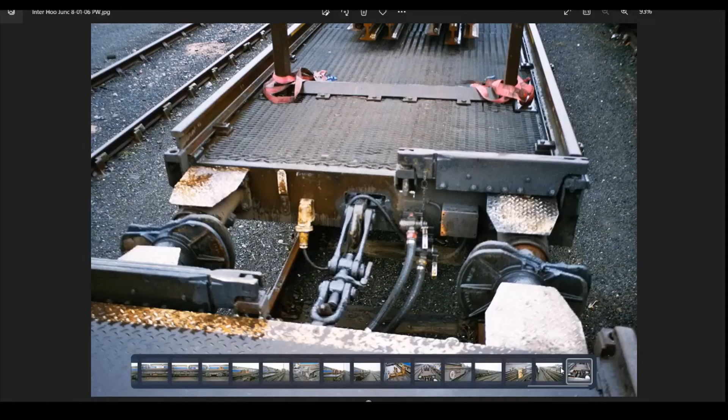Welcome back to 3D Drawing for Your Model Railway. We're continuing on with the long welded rail train we've been working on. Today's episode, what I'm looking to do is look at the guide rail that goes across between the two wagons, so the gantry crane can go along the full length of the train.

I've got the photos that Paul and Ernie supplied, and I've also got some diagrams that Paul's measured up from the actual thing that we can work the measurements from. I obviously can't share them - I haven't got a scanner to scan these diagrams in, or any other way of getting them in, so we'll just work through them. If you follow along with the measurements, you'll be able to keep up absolutely fine.

The first thing I'm going to draw are these little mounting points, and they're the same on both sides. So this one obviously has got the rail positioned into it, and then the other side, the little locking pin would fit in on this end.

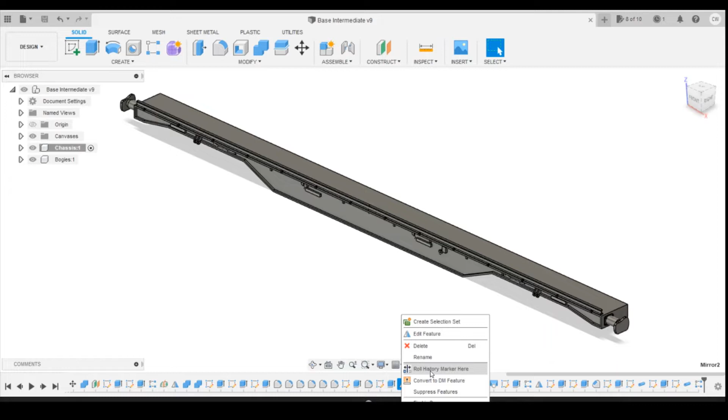These are all measured on Paul's diagrams as well, so I'm just going to be working from those. Because they're the same on both sides of the wagon, I'm going to go back in the history to beyond the mirror points that we've done, and then we can work along from that point onwards. I'm just going to click on the position, go to roll history marker here.

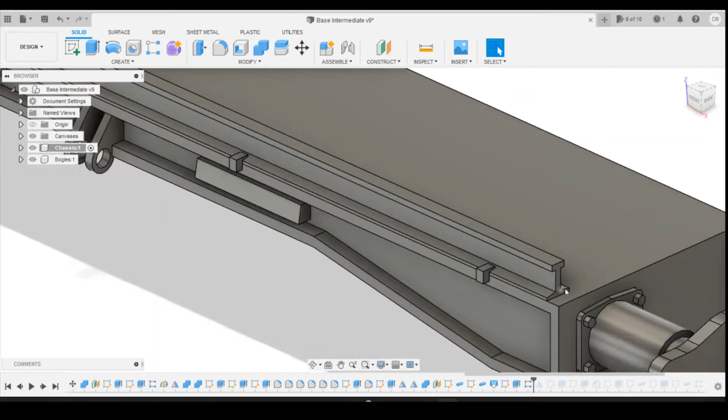That's the wrong mirror point. So that one we want. So we've got the quarter of the wagon here. We're going to start drawing in this position at the end here.

So going to draw side on. I'm going to draw on the side face here, and we're going to start by drawing a rectangle. I'm going to come up - the height of the guide isn't measured, but you can see it's about halfway up the rail. So I'm going to snap to this corner - I'm not clicking anything, just snapping to that corner - coming up about halfway up the rail, coming out and down.

Okay, so we can define the height of that. I'm going to go for 0.5 millimeters. He hasn't measured coming out, unfortunately, or it's not on the diagram. Looks like a couple of inches, so I'm going to go 0.6 millimeters. Actually, 0.5, just a little bit smaller. Okay, so the overall height of it is 11 inches, so we'll do 11 inches divided by 148. That gives us the height.

And then on the bottom, show you sideways, there's a little cutout piece here. That's 3 inches up, so let's put it all the way back in. It does, so we can go from the bottom corner. I'm just going to come out slightly though - I'm going to define the distance there, just to give us a little bit of gap, 0.1. And the position from the bottom to this point is 3 inches, so again define that - 3 inches divided by 148.

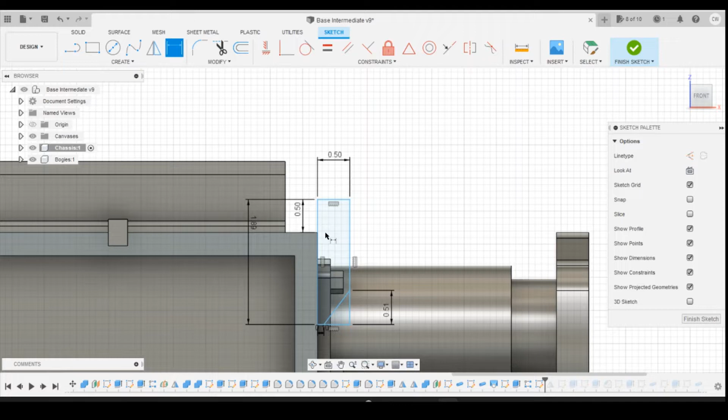Let's snap to there, so that should be fine. If we coincidence that to that point, it should lock that. Okay, so we've got that.

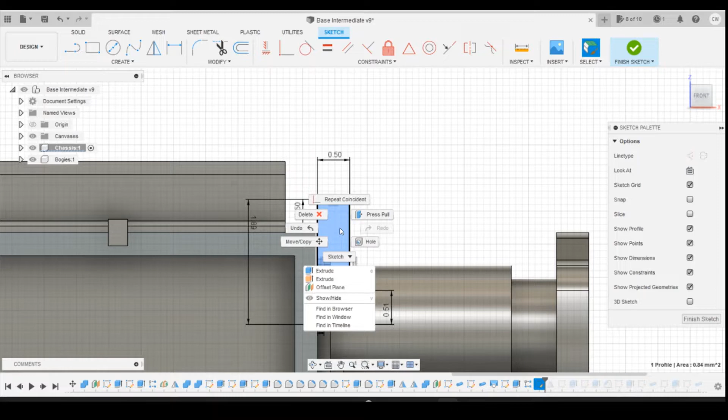Now, total the width of it is 4¼ inches. So we can take this, extrude it across the wagon, and it's 4.25 inches minus 4.25 inches divided by 148. Okay, and that puts it into position.

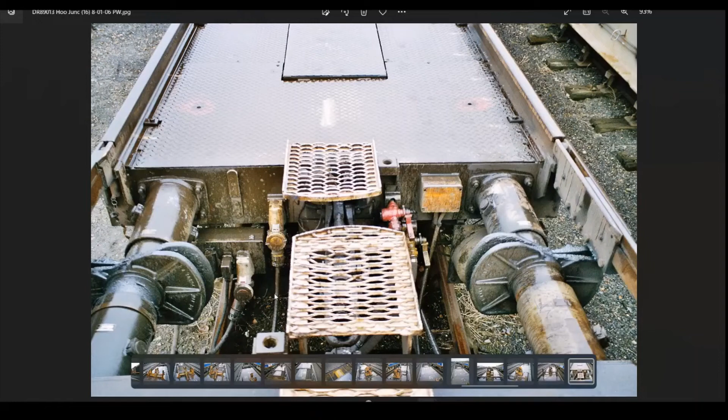It's pretty much right next to that buffer, which, yeah, it's slightly off, but I'm going to be living with that. Okay, so it's got a little cutout in there, and for that I'm going to draw on the front face of it. I'm going to slice through so we get rid of the buffer there.

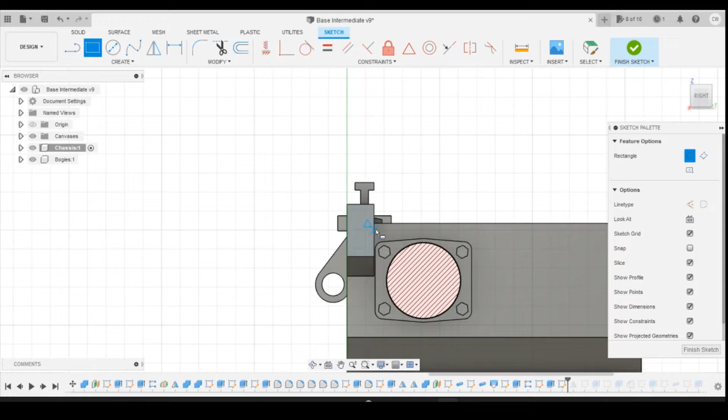I'm going to draw a rectangle, and the height of the cutout is pretty much where the top of the chassis is, so I'm going to project on the height of the chassis, and then we're going to do a rectangle, snap into that position, coming down to below the height of the bracket we've just drawn. I'm going to define the width on each side as 0.2.

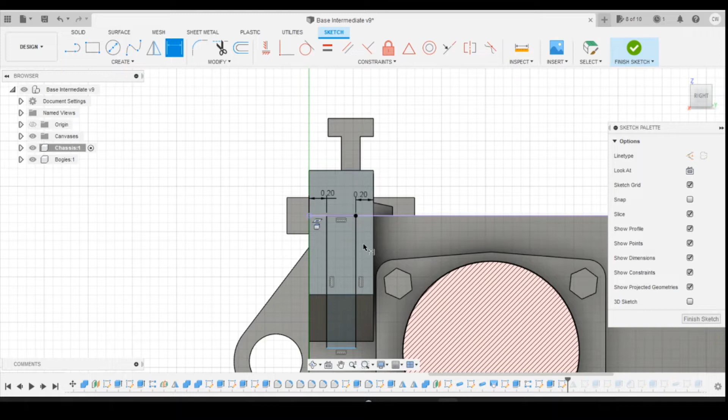And then select these two parts, and I'm going to extrude that to the buffer beam. Let it cut, and we've got that recessed area.

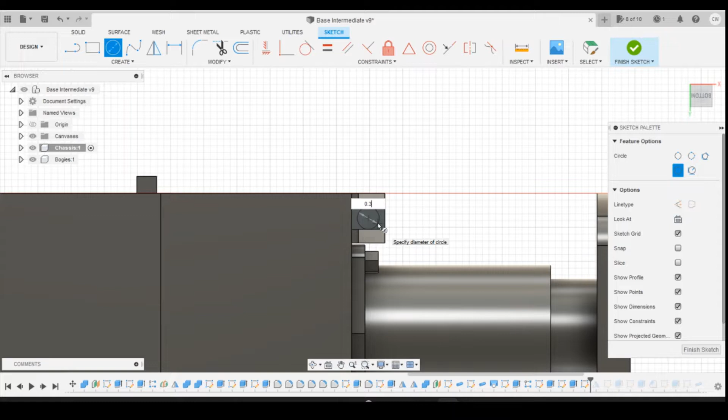Okay, and then it's got a small circle on the inside, so we're just going to draw on the bottom, find the midpoint of it like that, and we'll do 0.3mm in diameter, and extrude that all the way through to the top, so we've got a hole that goes all the way through.

Okay, so I'm not entirely happy with the position of what we've just drawn there, so I'm just going to alter some things, and that's going to include moving the buffer across, so this part isn't touching when we move, because I want to move this whole bracket in slightly. So I'm going to move the buffer across first of all, I'm just going to edit that sketch.

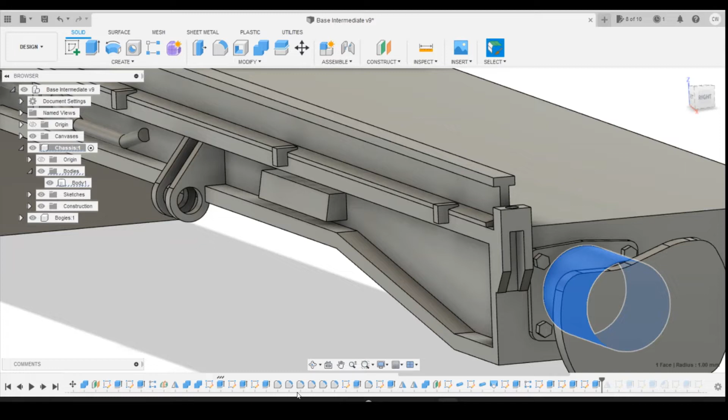So I've just selected the surface that I'm drawing on, let me show you. To find out where the buffer is in the history, if you select it, it will put these little lines above where the extrusion is. I'm going to come back into the sketch, just edit that, and move it inboard.

So 2mm - let's go 2.5mm. We might throw some errors up here that we've got to go back in and change, but we'll combat those if I need to.

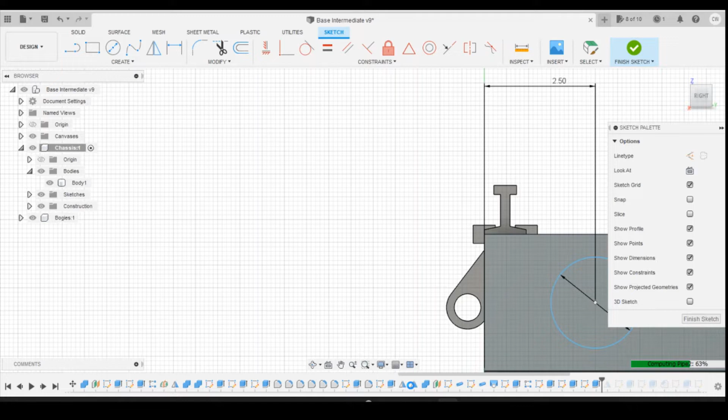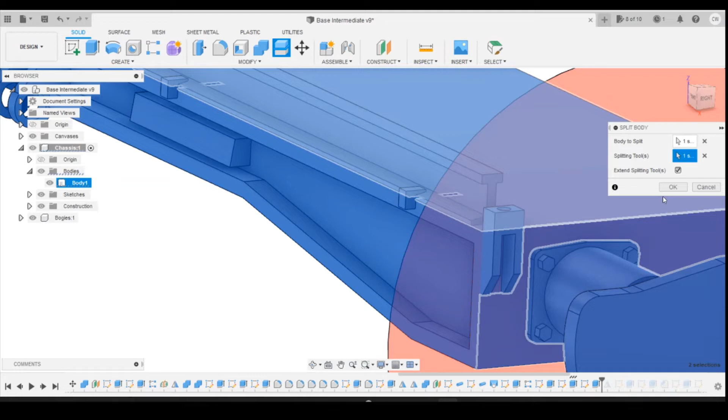Okay, it's coming across so fine. What I'm going to do is split the body with the splitting tool on the end here. That's going to take the buffer and the unit off there.

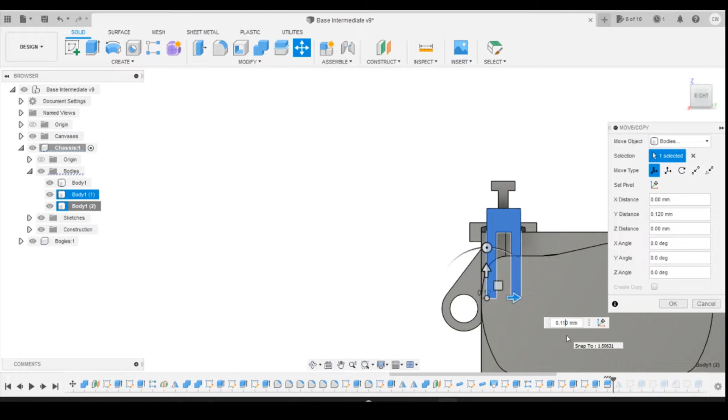And then I'm going to move the little bracket. I'm going to move it sideways, just because I want the middle of it to be roughly where the middle of this rail is. So it's coming in by 0.1.

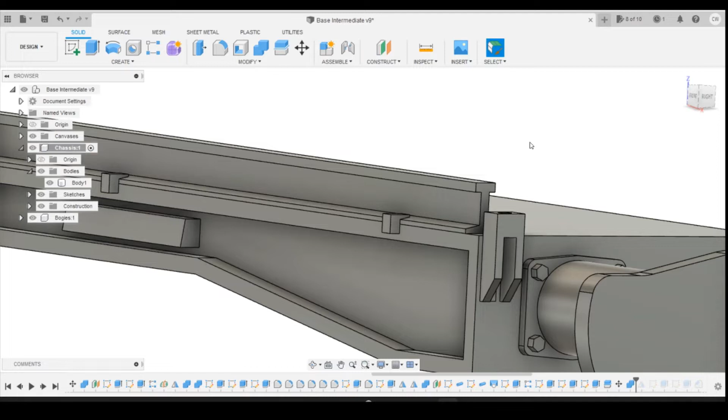0.11, I think that looks about central there. And then we can combine all of those bodies back together again. Happier with that, because at the moment, where it was, this was just sat to the side of the rail, and obviously the rail's got to sit in line with when it folds across.

Okay, so now at this point I'm going to jump the history back to the end, because the rail that we're going to draw is going to sit on top of this on the other end of the wagon. So just skipping through the history back to where we were on the last episode.

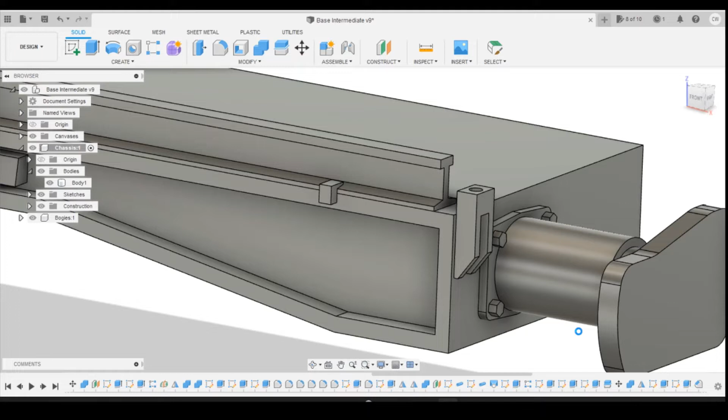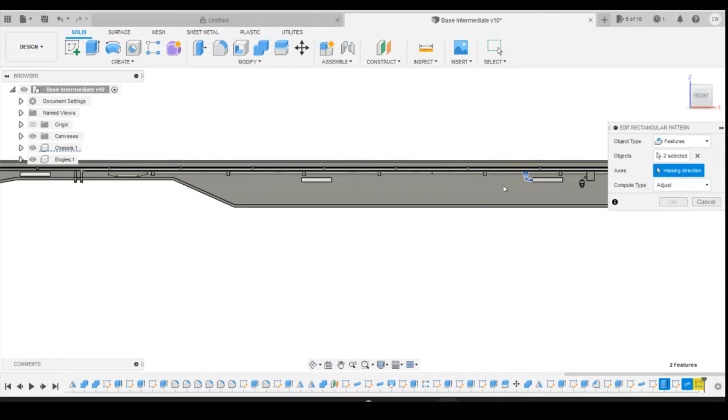And it's come up with an error. Let's work out what that is. So looking at this error here, if we go into edit rectangular pattern, you can see it's missing the axis direction, so just reselect that, which is the left-right position. The measurement should stay the same, just click on OK. And that's now fixed, that's just moving that across. For some reason it's lost the axis with the going backwards and forwards.

What we will do is we'll define this height, define the height of that. It's going to have to be level with the top of the rail, isn't it? So what we can do is, if we come at that, we can use vertical horizontal constraint that point to that edge, to that point, maybe. Do that.

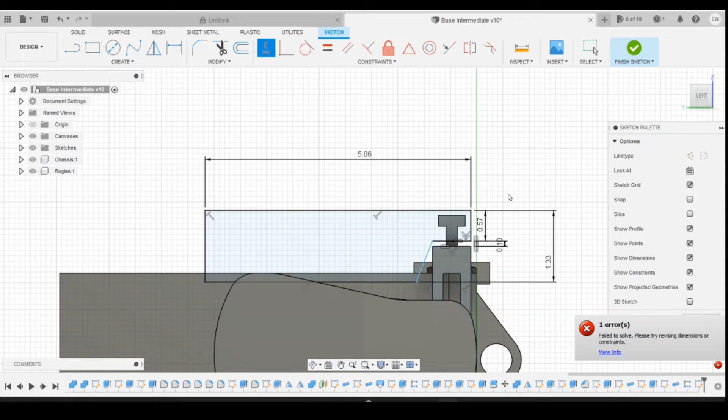Nope. So we'll put that in there. So vertical constraint, that point to that point. There we go. So that's going to define that height to be the same, because the rail's got to be the same height all the way along the train.

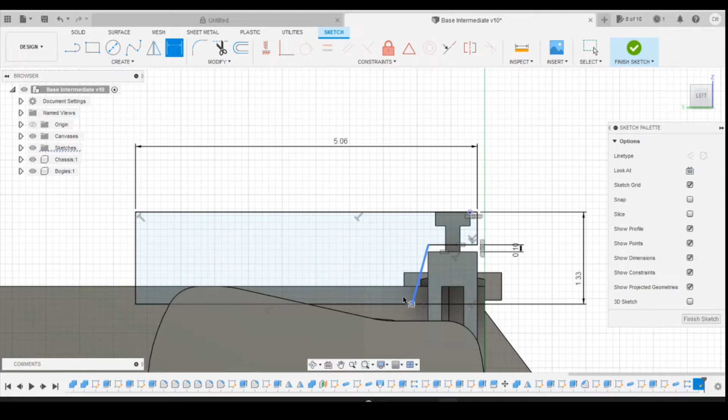Then we can bring this point in slightly, I think. And I'm going to define the angle between these two as 105 degrees. And we can put this little fillet in here just to round that edge off, doing a 0.2 fillet on there.

And define the length or the height of that. Doesn't like that. Define that. There we go. So that's going to be 0.57.

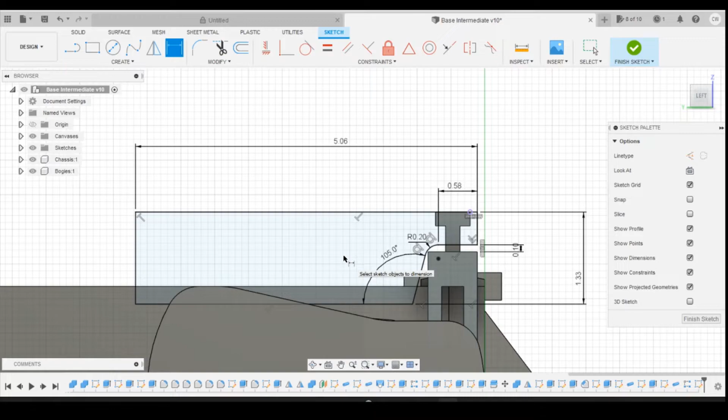The next bit we'll draw is this bit on the end here. Now according to Paul's measurement, that's 4.5 inches long. So we draw a line from there outwards. We can specify that 4.5 inch by 1.8. That doesn't look right to me. I think that should be longer than that. But Paul's measured it, but it just doesn't look right to me.

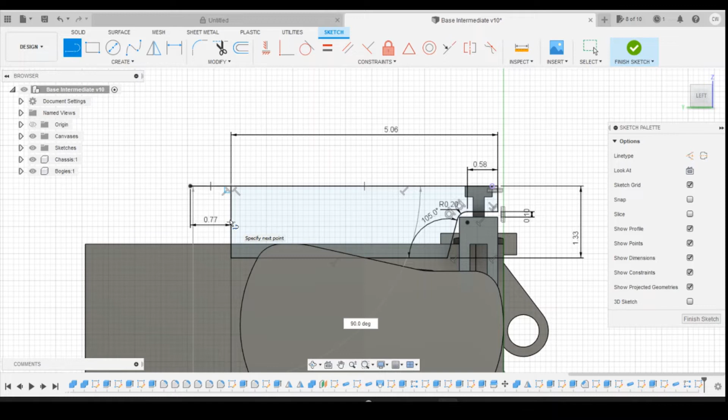The height of the whole thing, let's draw a line down. It's just lagging a little bit. Draw a line down there. It should be 5.25 inches. Try again. 5.25 inch by 1.8.

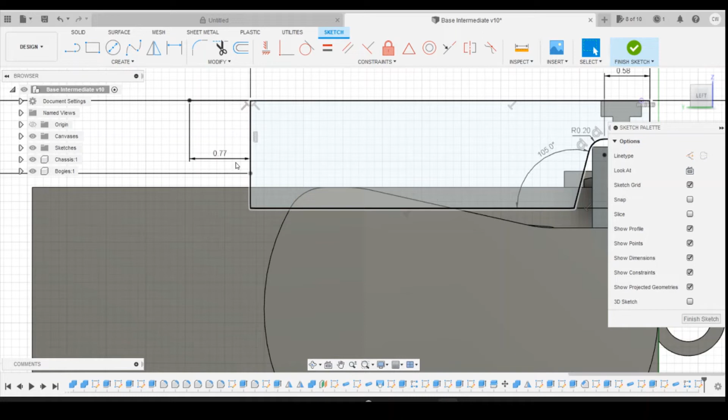I reckon that's more like 4.5. Doesn't look right, doesn't look right at all. I'm actually going to do it a little bit longer, I think. I'm going to go for 6.5.

Okay, we'll draw a line down here. 0.4 millimeters out.

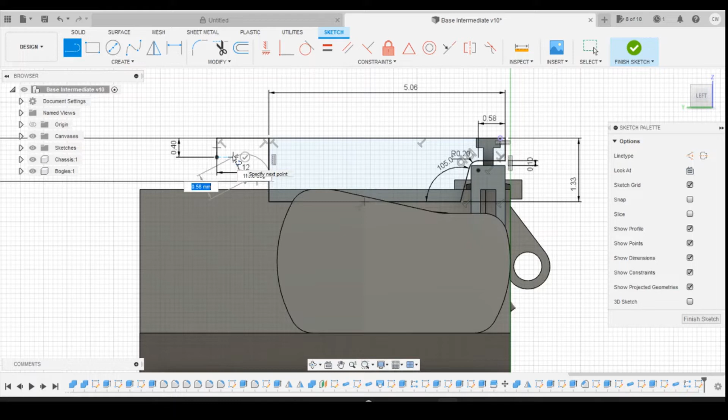So let's just define these. I'm going to do the same angle, so 105 degrees. Laptop's been a bit laggy today. That's 0.58, so it matches the other side. We'll put a fillet on there of 0.2.

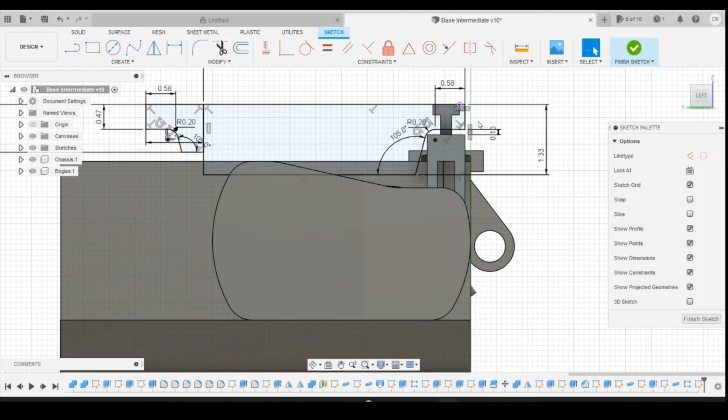And then that should draw that bracket similar to this. Just work out what that is. It's 0.47, so I'm just going to increase that to 0.47 so it matches the other side. Finish that.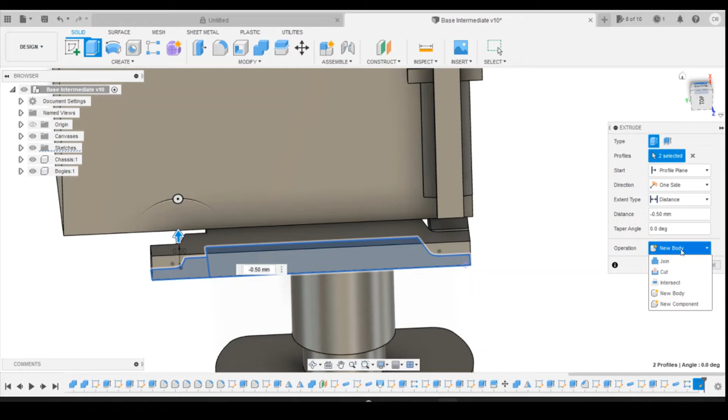Select those two parts and extrude them. Now they're going to be the width of this bracket, which is 0.5 millimeters. It's going to want to be a new body initially because it's not actually connected to anything, but we'll connect that in a minute. Click on OK.

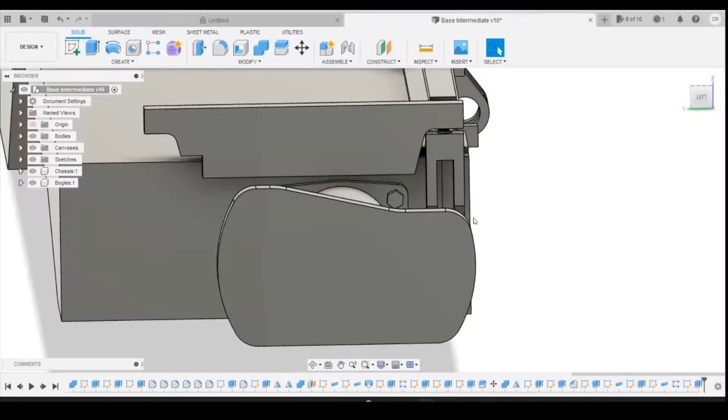So looking at the diagram, they've got two slots on each end. So for that, what we're going to do is we're going to cut out the top parts and then extrude that down, and then we'll put the pins coming down out of that. So it's going to draw on the top surface a small rectangle like this.

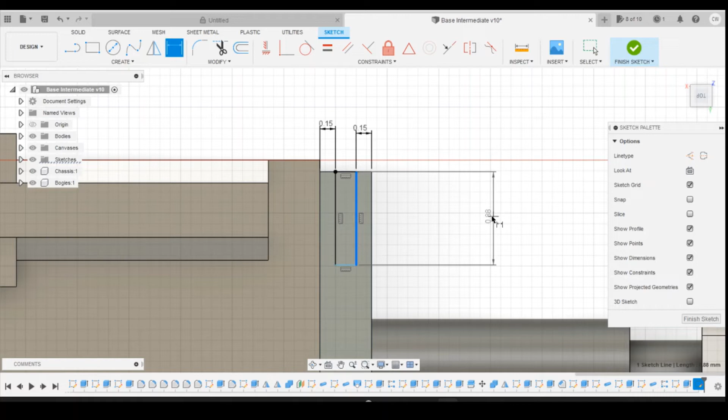And to find the width between the two edges, I'm going to go for 0.15. Length of it is 0.8 on that end. Do the same on the other end. Laptop's doing my head in a little bit today, it's just really lagging.

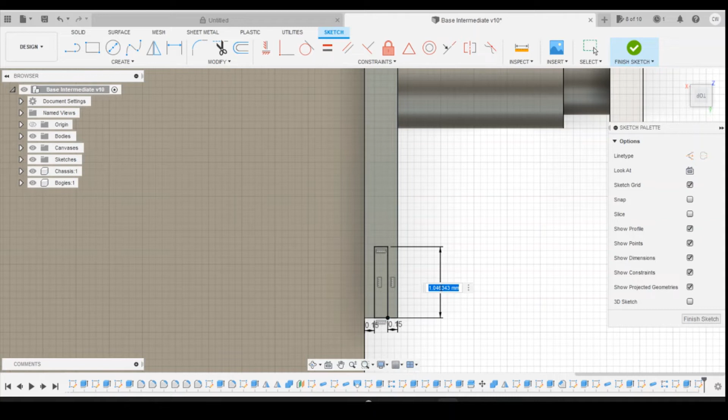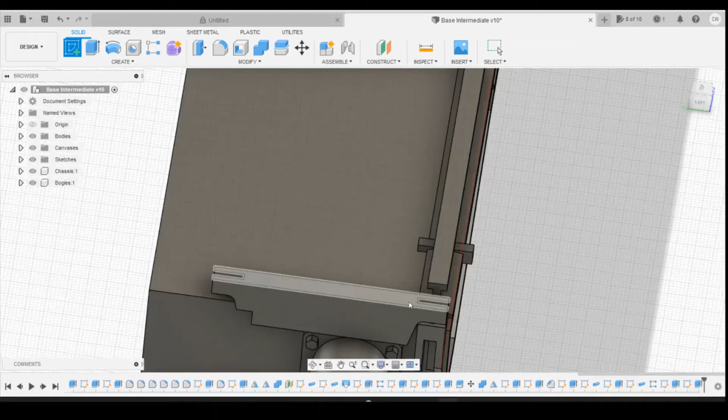Then we will extrude these to the bottom of that face, do a cut, good, and then we'll create a circle on the top face. Now the pin I'm going to put slightly bigger.

Let's go back to that extrusion. I'm just going to edit and drag that extrusion down just a little bit more, just to make sure it cuts. It's like a 0.5 just to cut all the way through.

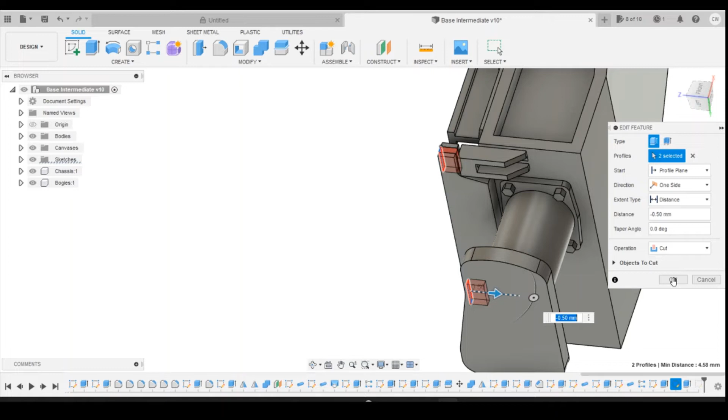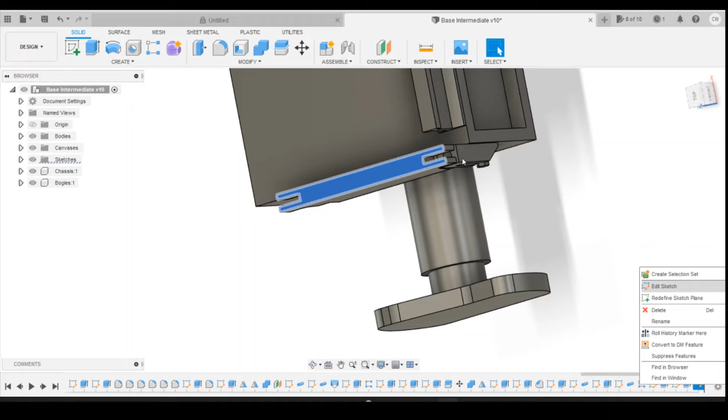Sketch. I'm going to draw a circle, and project it onto the circle on the bottom, drawing the circle the same diameter, 0.3 millimeters. Then select the profile.

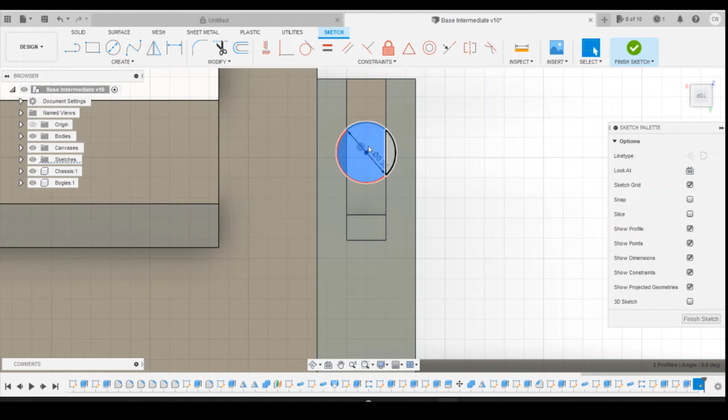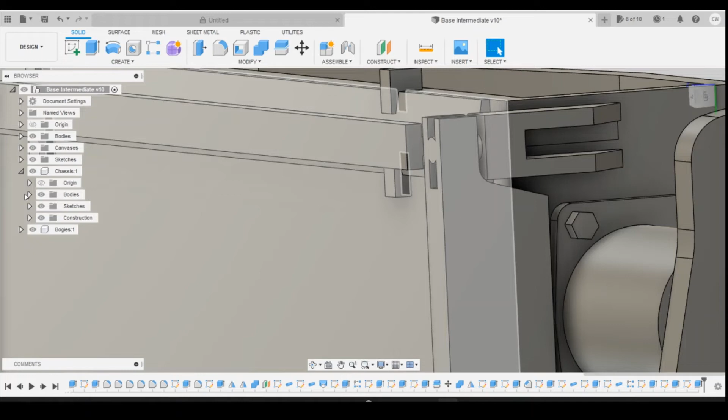Extrude, and come down into here and join so it's connected. That should connect all of that together.

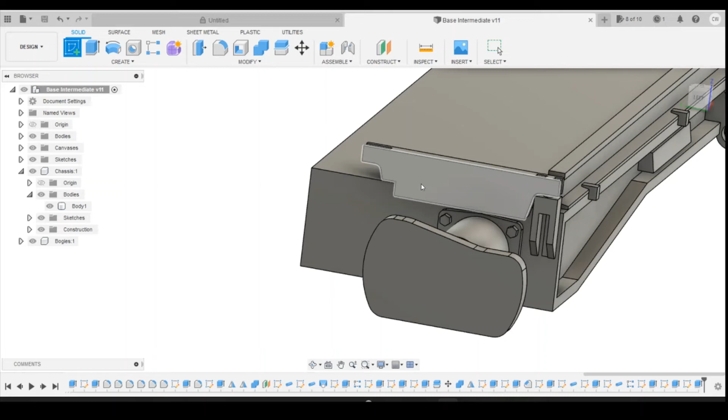Next thing I'm going to do is draw on these rivets. Draw a sketch on this front face, use a circle tool, 0.3 millimeters, and define the position of that.

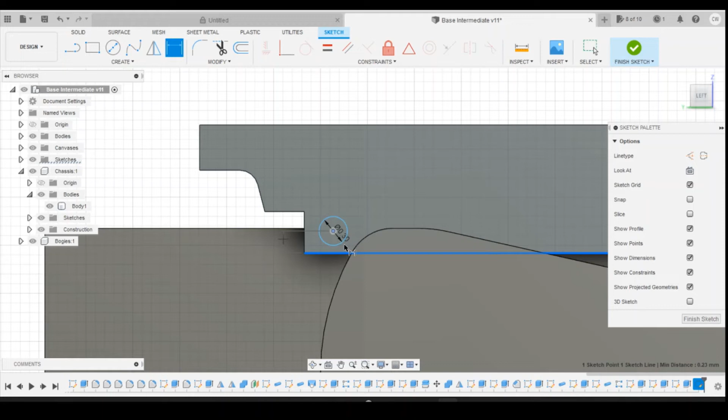Height 0.2, and distance from the edge, I'm going to go for 0.3. Extrude that, same as what we do normally, 0.15 millimeters.

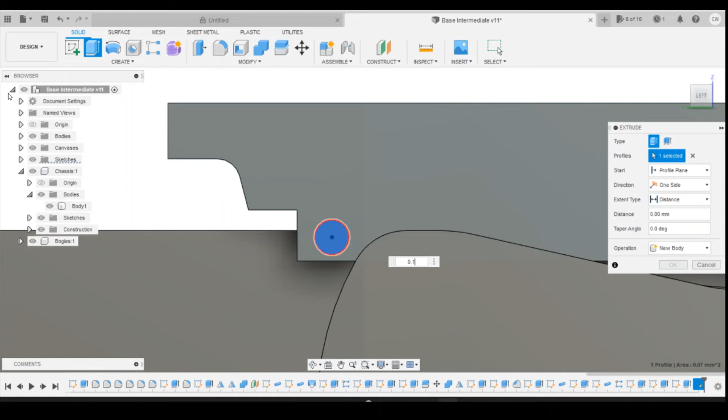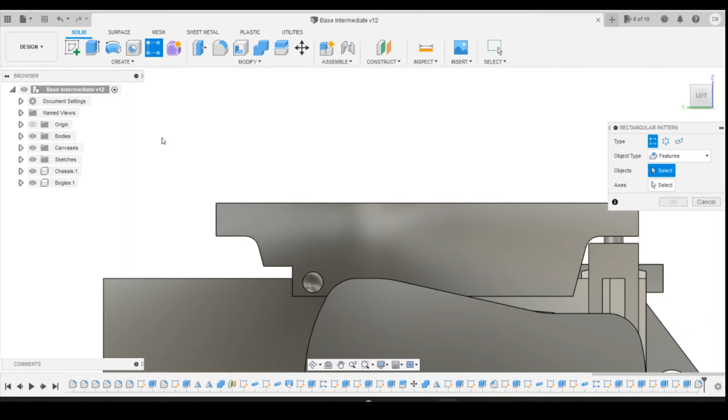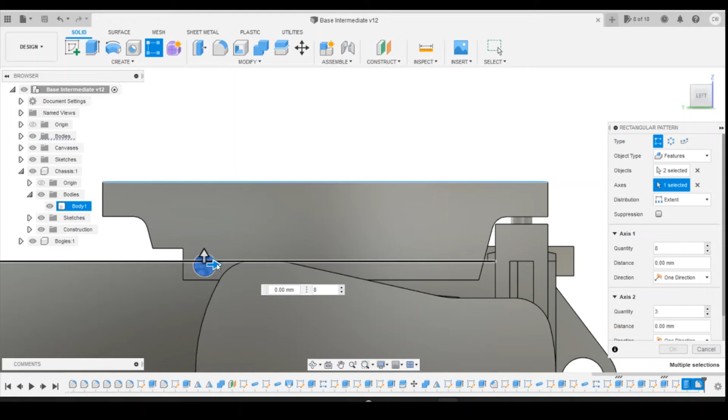Then what we're going to do is suppress that one and that one, because if you look at the picture, it's in a group of 1 missing, 4, and 1 missing, and 1 again. Do 8, we've got that suppression in there. So we come across 3.6, 8 in there, and suppress these 2.

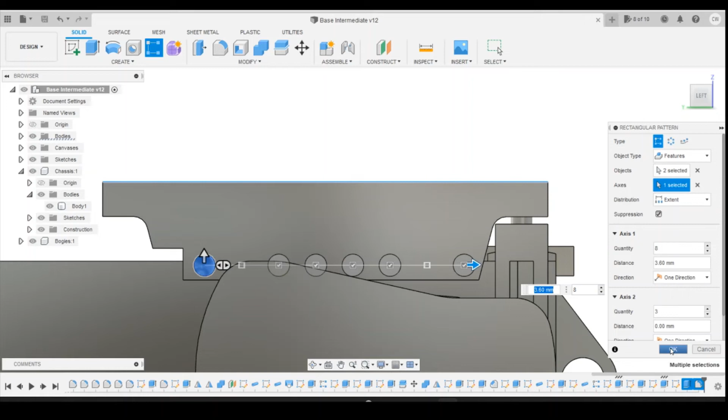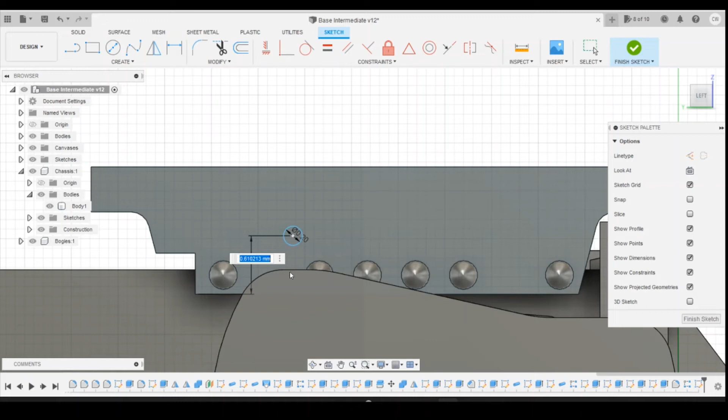We've then got 2 smaller ones we can add in here. Again, create a sketch on that front face, draw a circle, let's go 0.2. Define the height and base, go 0.6, and the height from that corner, we'll go for 1. We're going to extrude that out by 0.1, and then fillet that off 0.1.

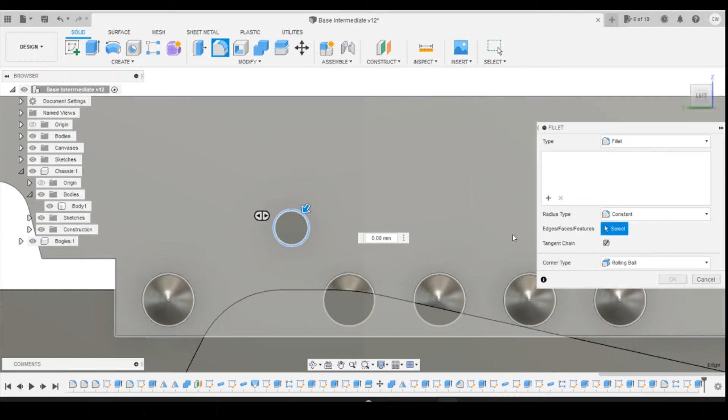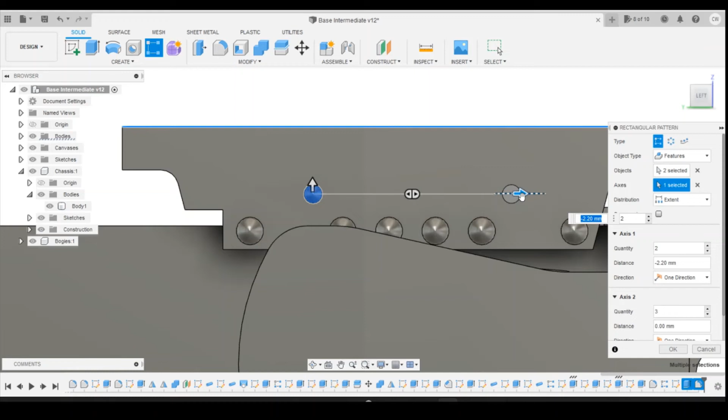So that smaller one, and then we can rectangular pattern again, extrusion, fillet, axis along. We need 2 of them. I'm just going to drag it along, that position there, so 2.2. And click OK.

What we're going to do now is just fillet out some circles on this side here, just to give us that rebate. Come onto the top here.

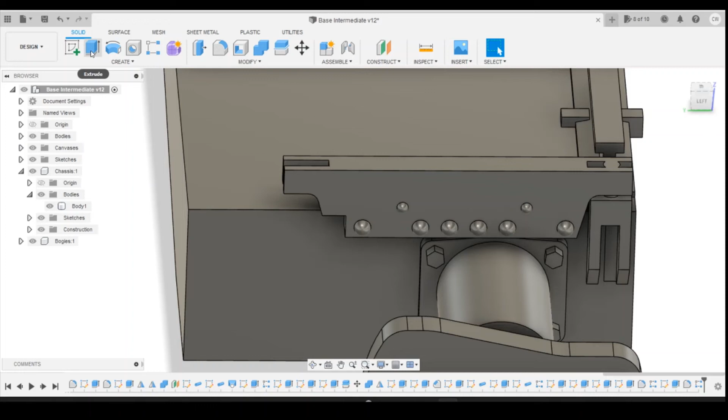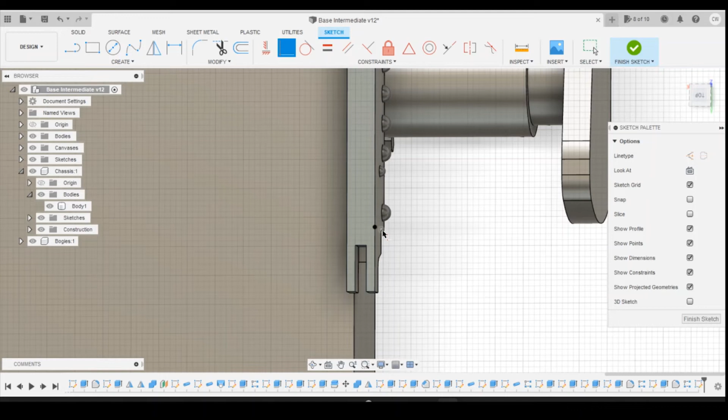I'll create a sketch on the top surface. I'm going to start by just adding a point. That's going to project on that point there, and then make it coincident to that. So yeah, coincident at that point there, so they're in the same position.

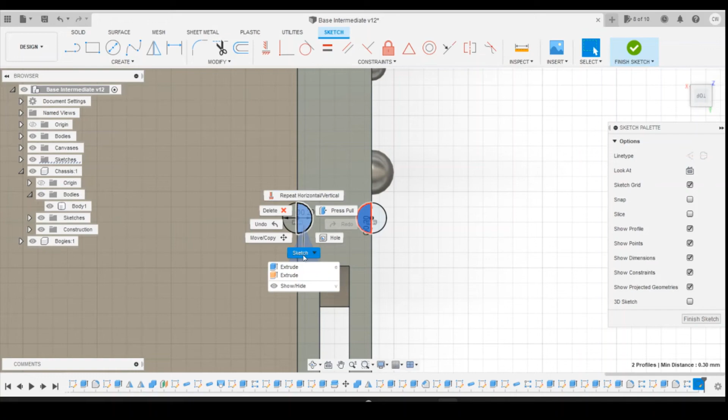Take a circle, 0.2mm, and we draw one on the other side, same, 0.2mm, vertically constrain that to that so it's locked into position, and then just select the 2 inside profiles there, and we're going to extrude it down

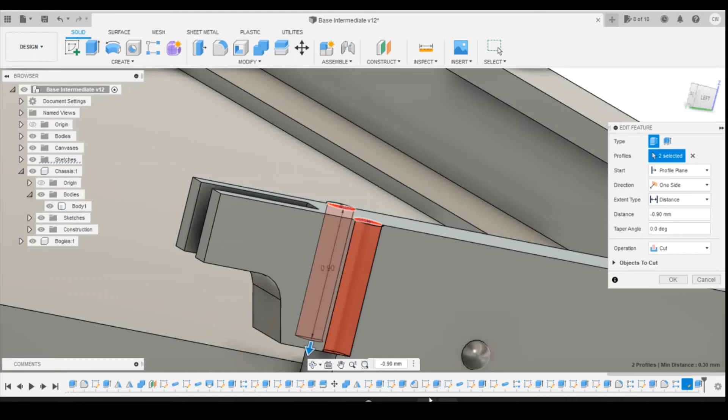to the bottom of this surface there, do a cut. I'm just going to actually go a tiny bit more, just to take the bottom off, so 0.92mm, just to take the edge off there.

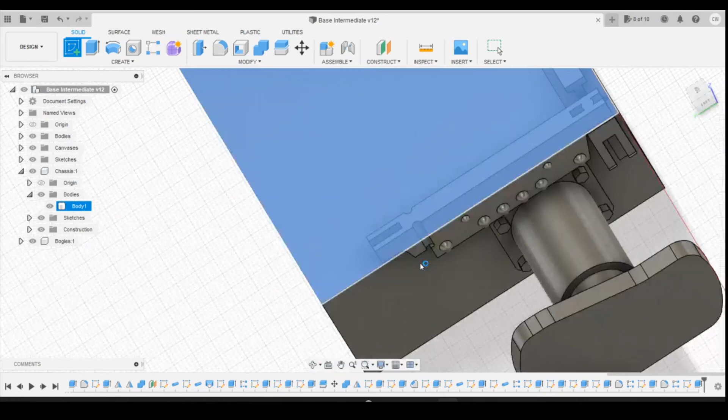The last thing we do is just draw this back bracket on here. So I'm going to draw a sketch on the top surface, use the rectangle tool, and go 0.5 by 0.5. And we're going to find the distance from that point to there, 1.6mm.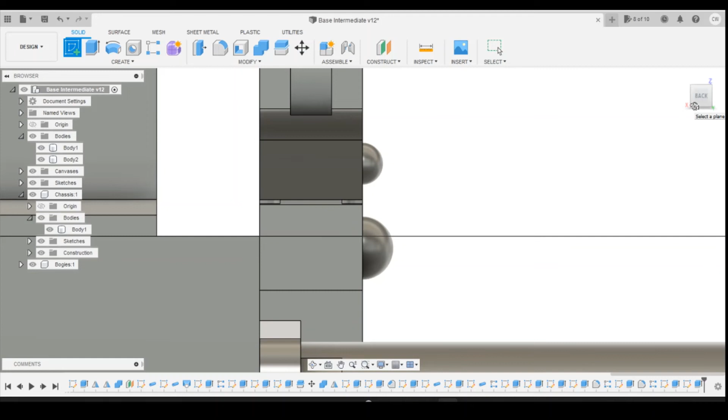So I'm going to create a sketch now on the side face there. Looking at the diagram, it doesn't go down far, so I'm only going to go down 0.4 millimeters, and

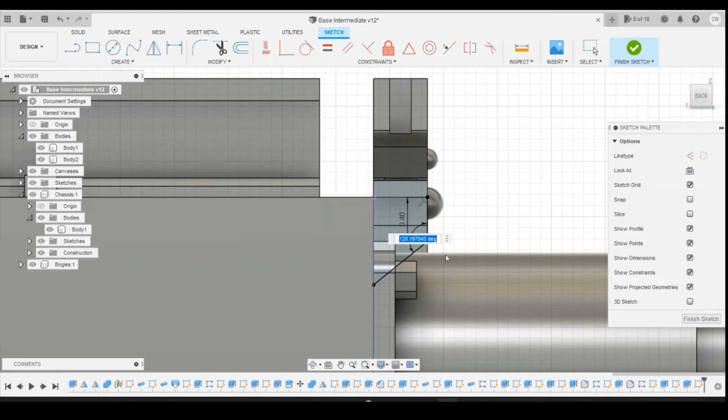then diagonal that, project the face, diagonal that backing, find the angle is 130 degrees, and extrude.

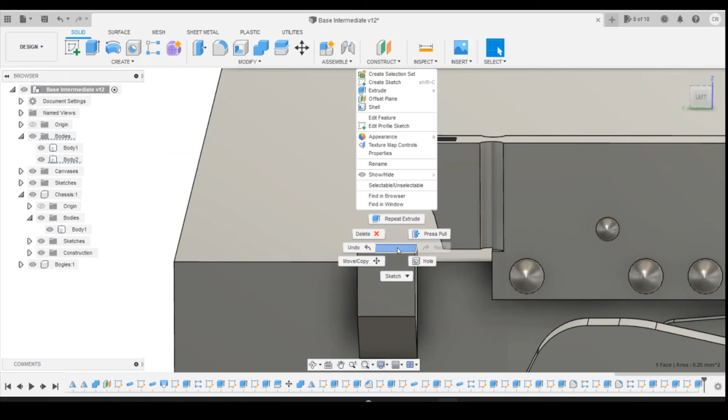That should be the height of this, so that's got to come up more. Extrude that top to that surface there. I'm probably going to make it wider as well.

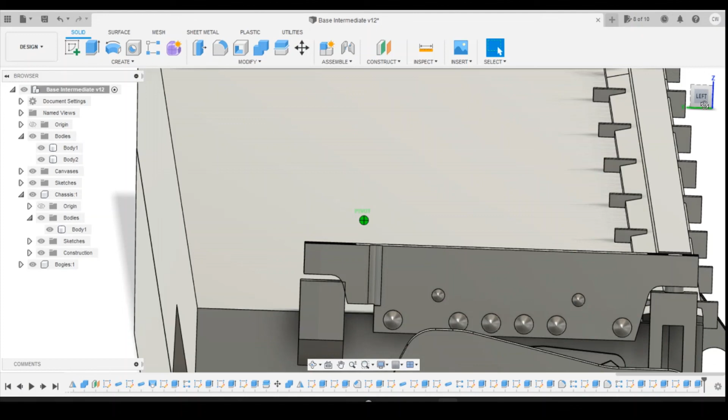I'm not going to worry too much about that overhanging in there because I'm going to put a pin in there, it's going to join anyhow.

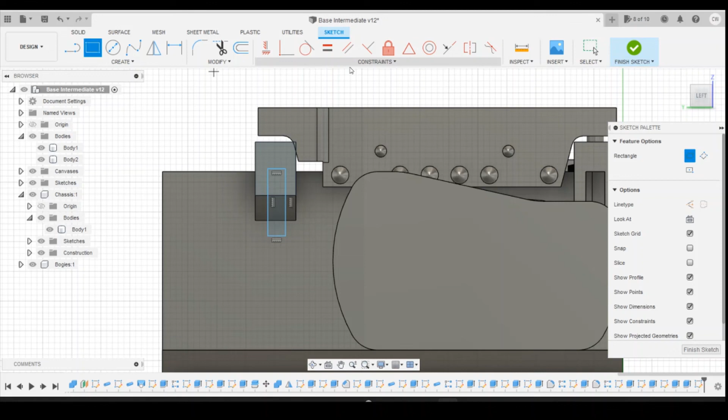And I'm going to draw a rectangle on the top here. Again, don't worry about the height of the top here. I'm going to vertically constrain that top to that point there, and then we'll define the width in here as 0.2, same as we did in the other one, 2. Extrude both of those to the buffer bit plate, and then it will cut.

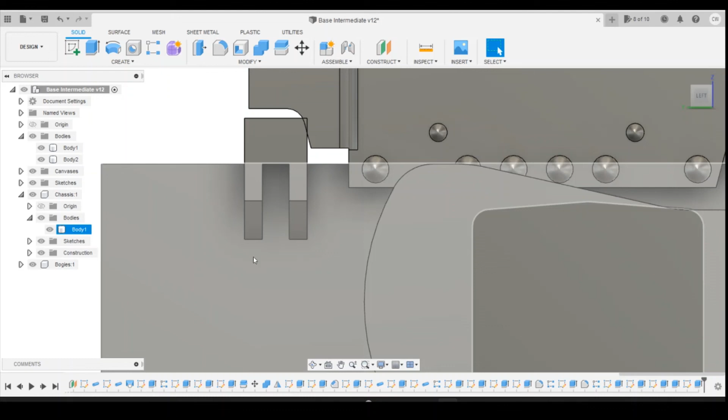Draw. I'm not going to draw the hole because you won't see this, because it's going to be folded over on this one.

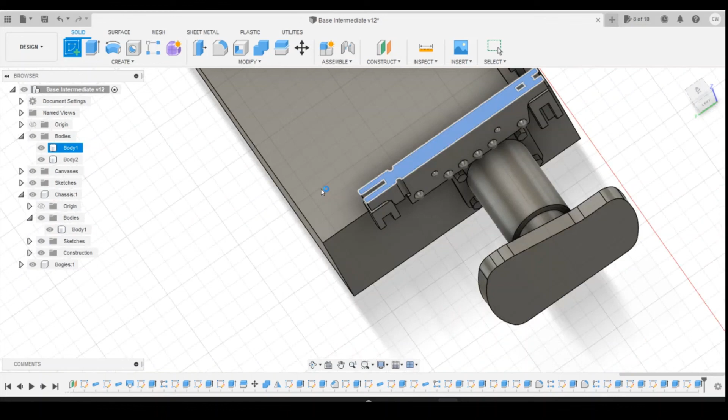Draw on the top surface there a circle that's going to be in the middle of that, 0.3 in diameter. Select those 3 profiles. Extrude that down, take the join.

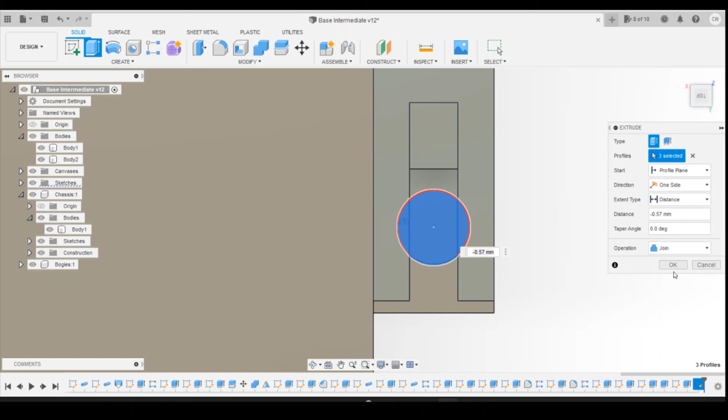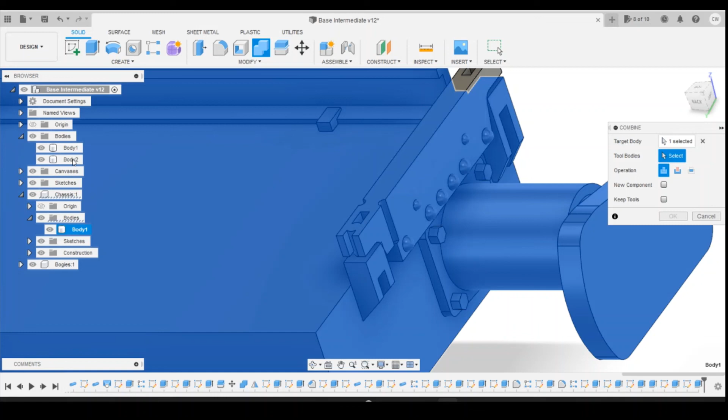Okay, so let's sort this out. What we're going to do is select combine, use body 1 there, and then we're going to select these 2 bodies, and combine those, they'll all come back into this one. It's just going to make it a little harder to find the sketches, but hopefully it won't be too much of a problem.

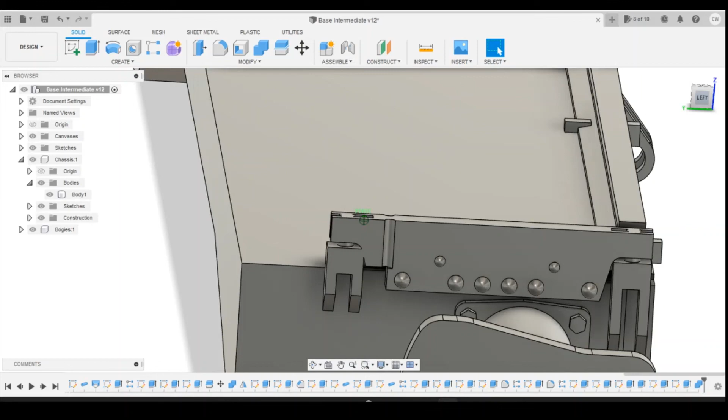Okay, so that's looking good there. I think I'm going to finish this video at this point. I'm pretty happy with how that's come out.